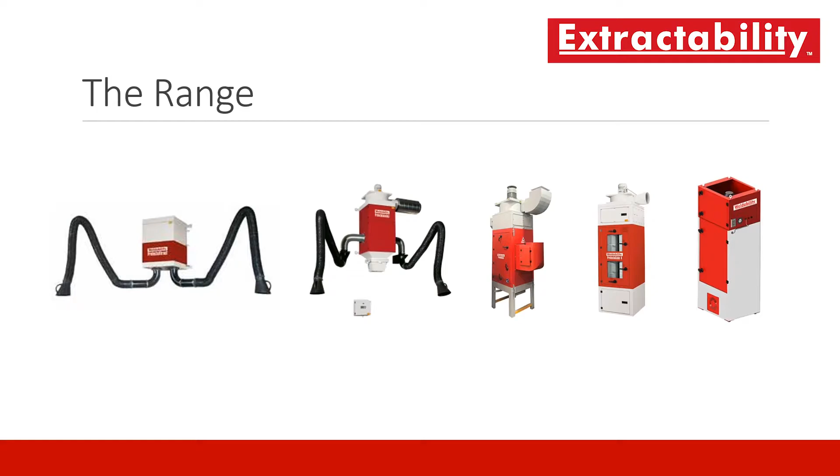The range starts off with competitively priced wall-mounted units capable of extracting up to 2 extraction points, all the way up to large single centralized fan and filter units capable of extracting up to 20 points, as well as our unique systems designed specifically for oil mist extraction.

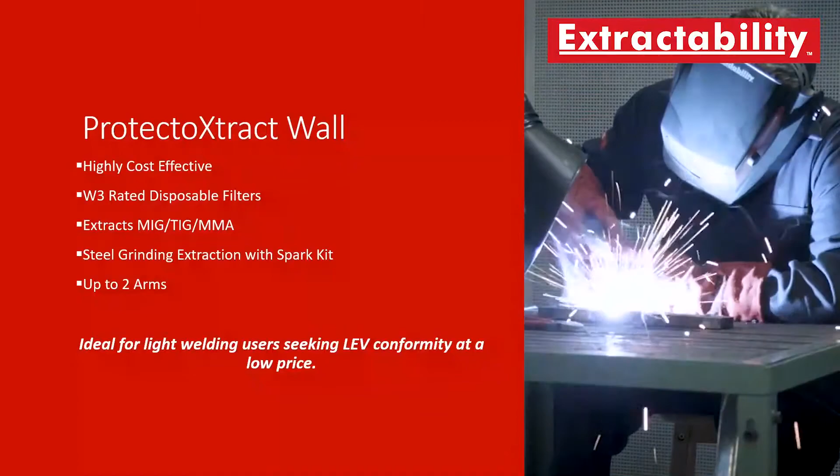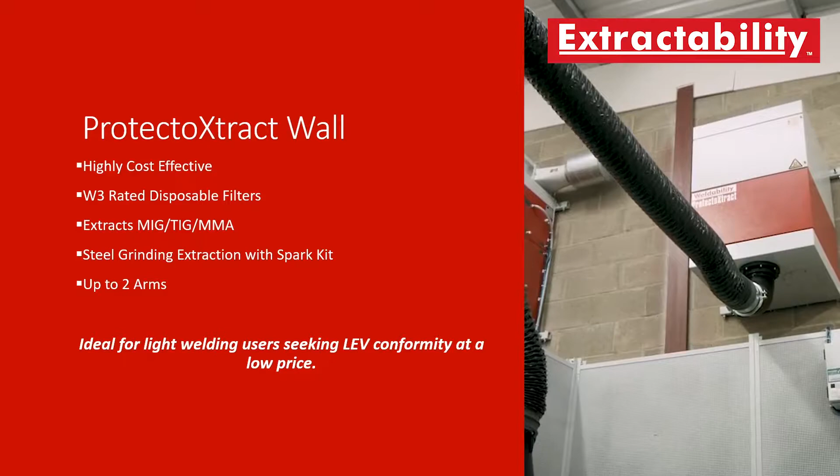At the start of the range, we've got our ProtectoXtract wall, which is a very competitively, highly cost-effective unit capable of extracting up to 2 extraction points. This comes fitted with those all-important W3 rated disposable filters. This extracts MIG, TIG and MMA welding fume and can extract steel grinding dust and fume provided it's fitted with the retrofit spark kit. This is ideal for your light welding user seeking LEV conformity at a low price where it's not feasible to fit a mobile unit in the workshop instead.

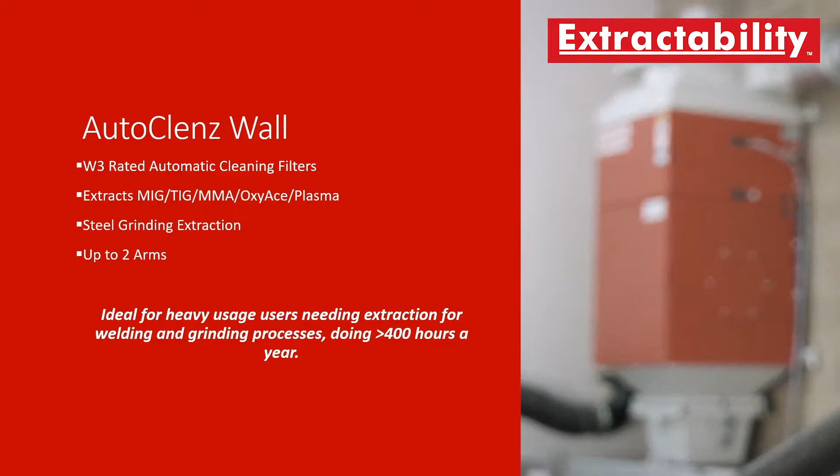Next up, we've got our AutoClenz wall unit, which has W3 rated automatically clean filters. This can be used to extract MIG, TIG, MMA as well as oxyacetylene and plasma fumes, and this unit can be used to extract steel grinding dust with its built-in cold plates. This unit can be fitted with up to 2 arms, allowing extraction for up to 2 points, and is ideal for your heavy usage users needing mixed extraction for a wide range of processes, doing considerable amount of welding fume extraction hours a year.

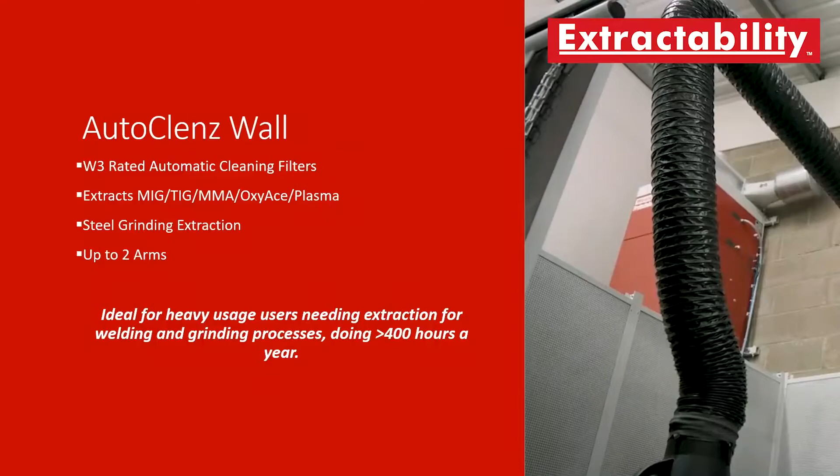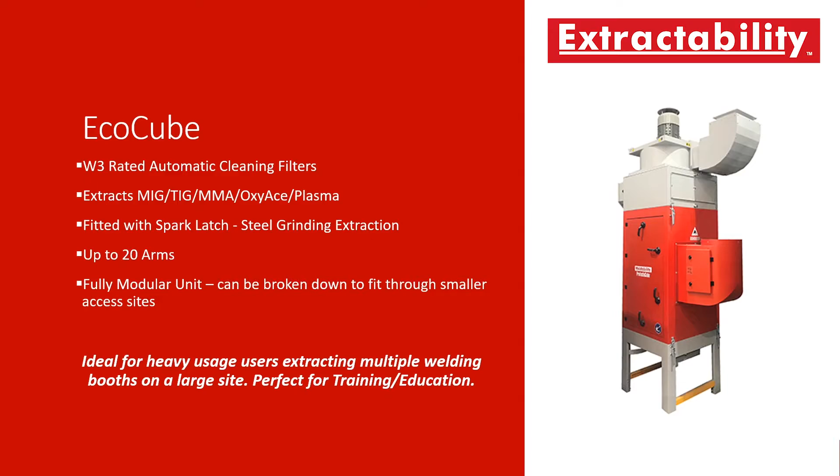Next up, we've got our EcoCube, which is a W3 rated automatically clean filter unit. This unit can extract MIG, TIG, MMA as well as oxyacetylene and plasma fumes, and this unit comes pre-fitted with the spark latch to allow steel dust grinding extraction. This unit can be fitted with up to 20 arms depending on the fan power, and is a fully modular unit, so it can be broken down to fit into smaller parts to fit onto smaller access sites. This is ideal for heavy usage users extracting multiple welding processes at several different booths on a large site, and is ideal for that training or education circuit area.

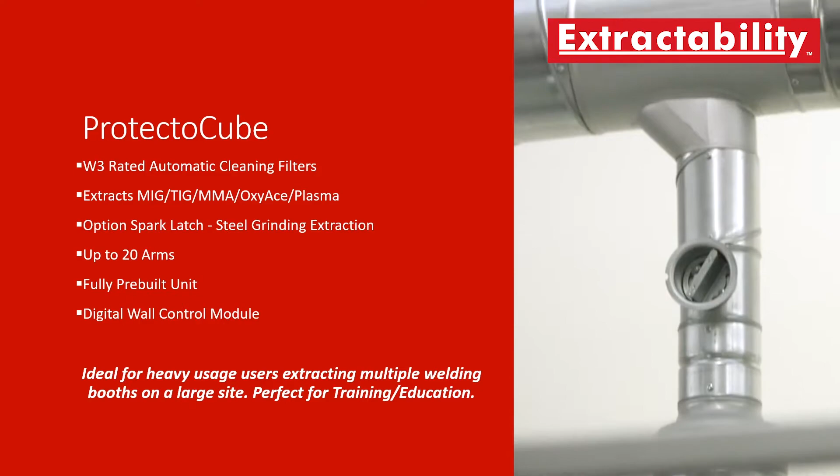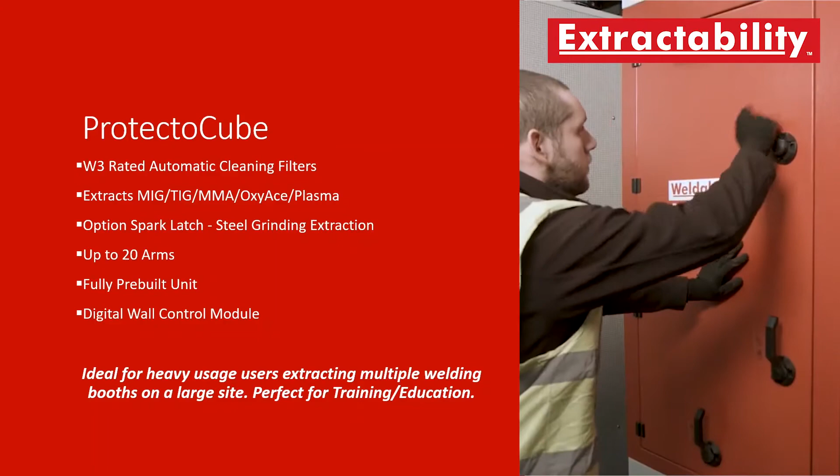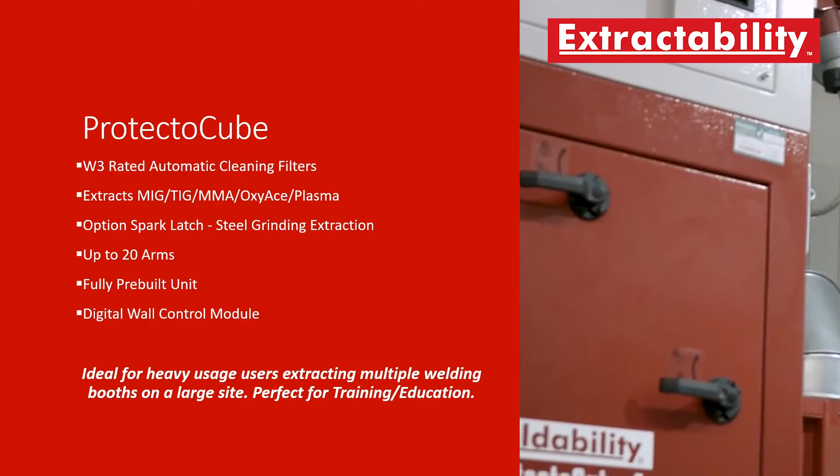Next up, we've got our ProtectoCube, which again is a W3 rated automatically clean filter unit. This unit can extract MIG, TIG, MMA as well as oxyacetylene and plasma fumes, and this has an optional spark latch that can be fitted alongside it to allow the extraction of steel dust grinding extraction. It can extract from up to 20 arms, it comes fully pre-built and fitted as standard, and it comes with a digital wall control module so that you can monitor the filters and the system health. This is ideal for heavy usage users extracting multiple different processes from multiple different booths on a large site, and again is perfect for that training or education area.

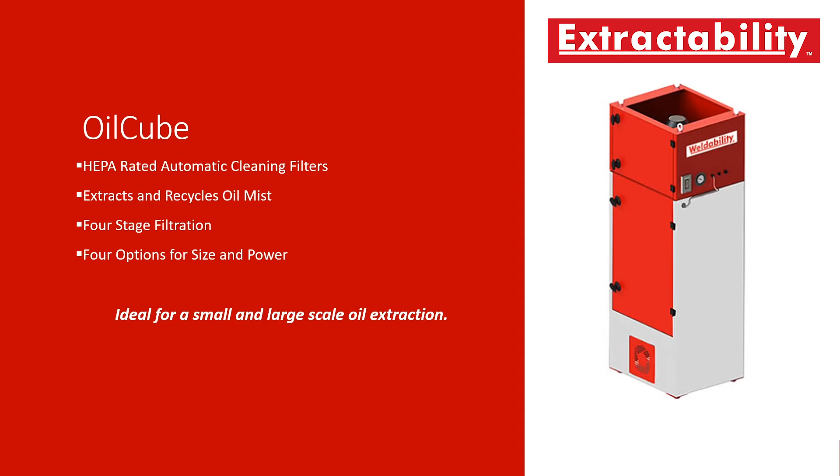Finally, we've got our OilCube, which is a HEPA rated automatically clean filter unit. This particular unit is ideal for extracting and recycling oil mist. It has 4-stage filtration and it has 4 options for size and power, so it's ideal for small and large scale oil extraction where you're looking for a bespoke system to extract from different CNC machines.